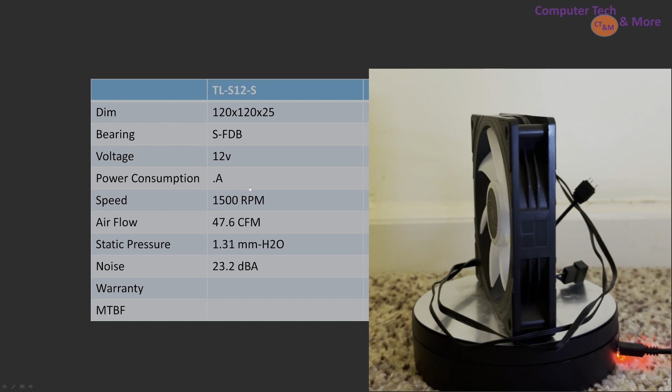First, the spec information: bog standard 120mm class fan, fluid dynamic bearing, noise, and everything else. Alright, here we are, taking a look at the RGB of the TL-S12-S. So I previously liked the TL-S12 regular, which doesn't have the illuminated central fan, as it's a little bit more subtle in its RGB, while this gives you more of that forward-facing blam, or however you want to call it. And, well, the RGB looks pretty good.

It has 8 inner LED lights, which is a pretty good amount. A lot of cheaper fans will have like 6, 8 is what I'm calling like the middle tier, and anything more than that is like higher tier fans. Sorry, my focus is really having a hard time with this fan keeping itself in. And of course the outer lighting ring looks, well, pretty good.

If we come around to the back, not nearly as sharp as the front, but there's only 3 struts, doesn't obstruct the view too bad overall. So overall, I call the back kind of a win. It's certainly appealing, and I think they have reverse blade versions of these fans. I hope to be able to acquire them because I have been trying to test more of these reverse blade fans that are coming onto the market to really know how much performance difference there is between regular fans and, well, reverse blades.

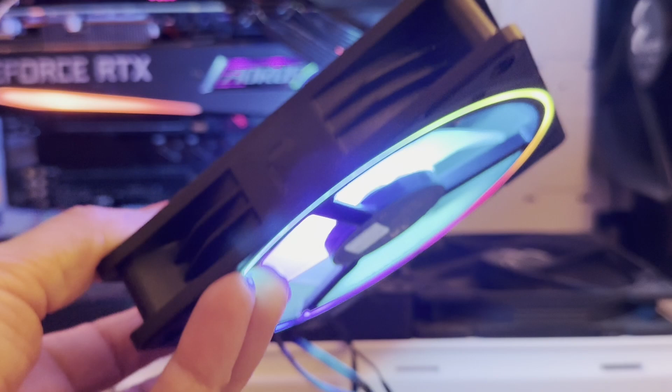As I stop the fan, here we go. The fan blades are fairly unremarkable. They're just smooth. The edge distance between the blade and the housing is actually fairly tight, which is great to see. It's one of the reasons why, despite the fan's low RPM, it's actually fairly efficient overall in terms of its thrust. Now, one weird thing with this fan is it has this cable sticking out the side. I just assume that it's extra power feeding into the RGB, but it's not very attractive, but you can also easily hide it. It's just one of those weird things I've noticed on this fan. It's got a little bit of rubber padding around the edges, but other than that, the design is pretty clean and basic.

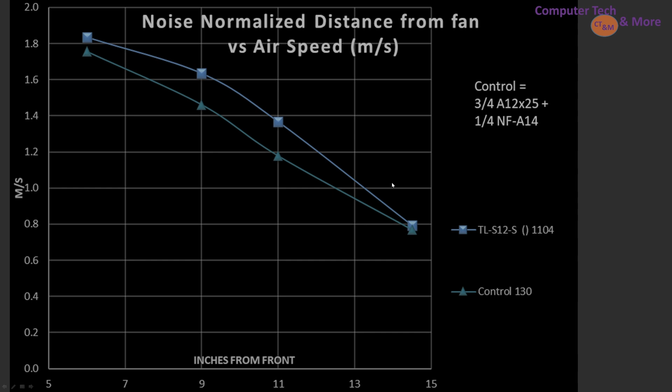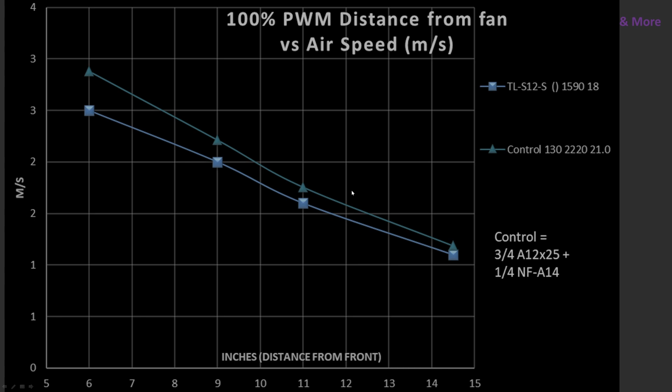At 100% PWM fan signaling, they line up very, very closely, interestingly enough. Mind, the TL-S12 is a little bit underneath; it's no surprise, it's spinning at a pretty significant amount lower than it. When we compare against other fans, noise normalized results, at my 10.5 decibel reading, the TL-S12-S is sitting right here in the middle of the pack. Actually, it's in a very good position overall.

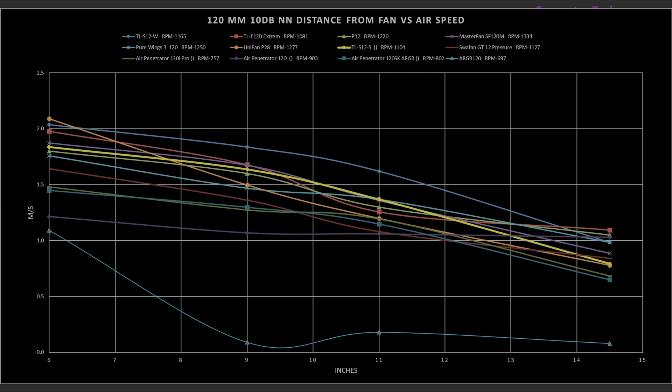If you're looking for something interesting, right here in this blue diamond is the first TL-S12 that I reviewed, and it does quite a bit better. So this is utilizing bearing and air noise going through it. So it could be that I just got a worse sample, or that one I ended up getting a golden sample. It's really hard to know, but it gives us a spectrum for some variance between the two fans. Or maybe it's just because the materials the fan is made out of to make it translucent change properties a little bit. It's hard to know exactly which is going on.

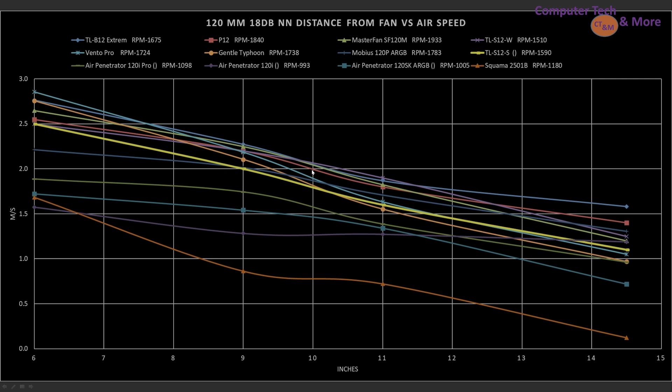I'm bumping things up to my 17.5 decibel reading, so this is a new noise normalized result. And it is towards the bottom end of these upper fans. Still a very good result, and at larger cases, it is basically middle of this upper end solid grouping of fans, so I'd call it a good fan nonetheless. If you're looking for the original S12, it's sitting just a little bit above it. This purple line with the X ends up overall, on average, slightly better than it.

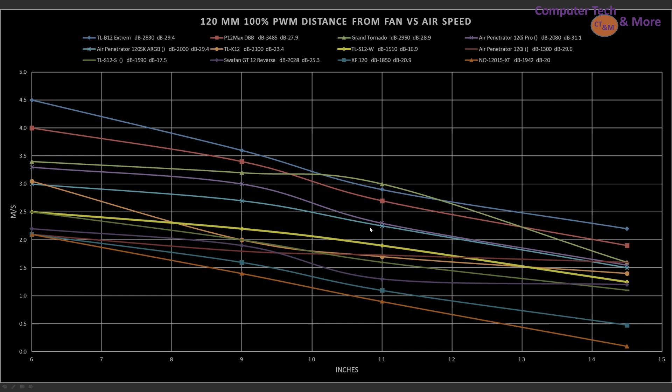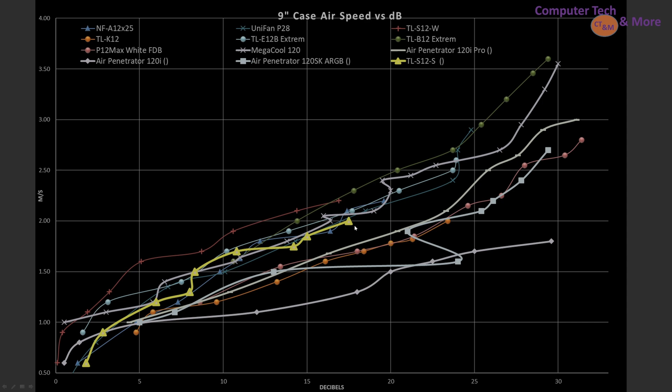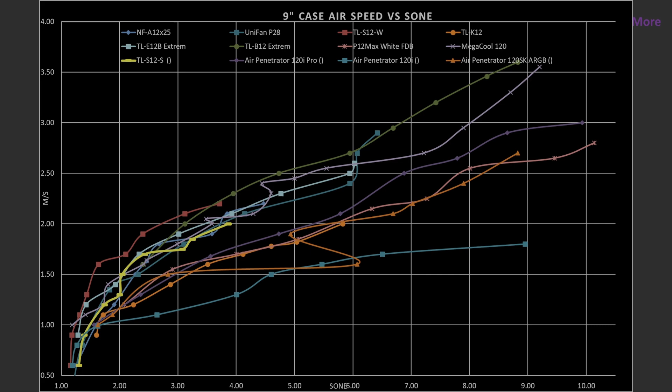Looking at the data in just a slightly different way, this time in Sone. Sone basically compacts noise levels that are quieter and stretches out noise levels as they get louder, so they extend off here to the right side a bit more. And the S12 doesn't get particularly noisy simply because it doesn't spin that fast, so it doesn't have the opportunity to get noisy. So in its performance realm, it does really quite well. So it would be an excellent pick, assuming you're not running an incredibly hot system. Then you might need more airflow, unless you can really stack your computer case with plenty of airflow cycling in and out with a number of these fans.

Now we're looking at performance on the CPU air cooler. The cooler of choice is the Noctua U12A. And on the left side here, we have airspeed versus RPM. This is basically blade efficiency. It's how good is this blade design compared to my blended control fan. And it lines up fairly closely. So that is, well, a good thing.

It does trail it ever so slightly, but not too far off of it. So I'd say its blade design is very effective. In terms of its noise efficiency, it is trailing my control fan a bit, but it's not too far off at lower RPM airspeeds.

But as things get cranked up more, it tends to fall away a little bit more, so maybe not as strong a choice in that realm.

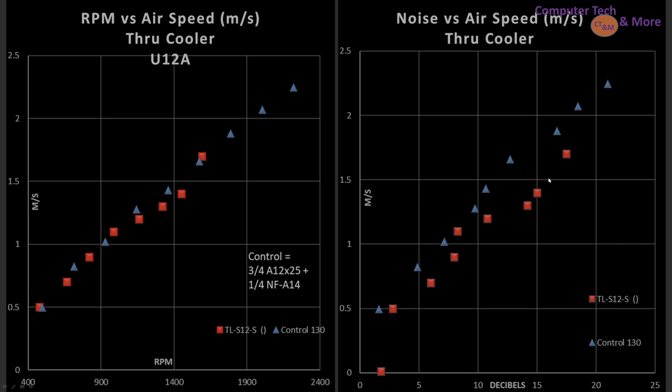And now validation for my radiator versus my air cooler. I ran the air through it. This isn't saying that the cooling potential between the two devices is the same. This is saying that the resistance to airflow, in theory, is similar.

This is one of the few tests where I found there to be a larger difference between the air cooler and the radiator. In most other fans, they line up near on identically. This is the only one where there's a bit more of a separation between the two, where the radiator is actually easier for it to blow air through, which is kind of funny because you would think the radiator would be the hard one, right?

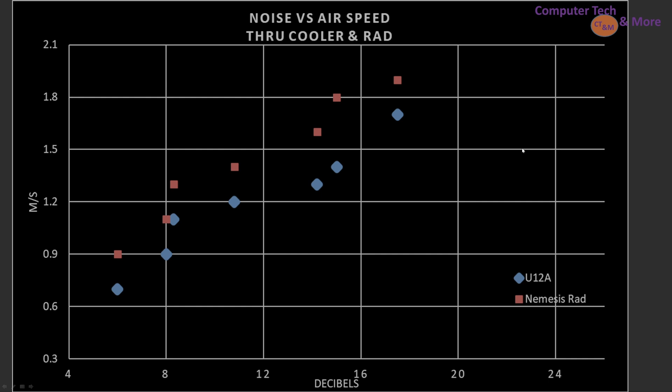Viewer suggestion, locking in those RPMs and just seeing how it does. I have my weighing factor over here on the side, if you're wondering how these fans are weighted, which is why something like the Iceberg Thermal Xtra is rated so high, but it is not ranked first because its noise level is screaming loud compared to the other fans around it, so that drops its position back quite a ways.

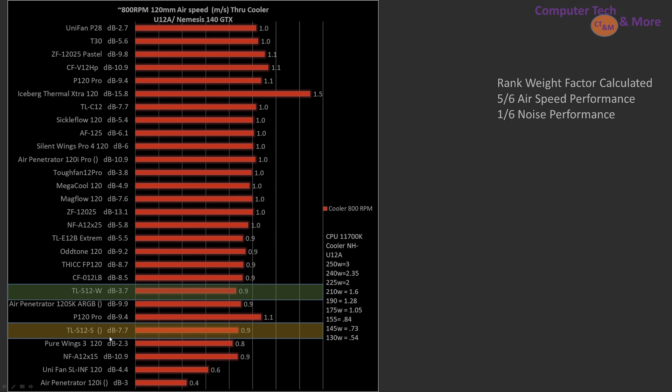The S12s are ranked towards the bottom of this graph at 800 RPM. It's just not where they're particularly effective. I don't think that they're gripping the air quite strong enough to generate that pressure. By the time we hit 1,500 RPM, they look a little bit better, but the TLS12S is trailing behind, actually pretty significantly. I would expect more out of it.

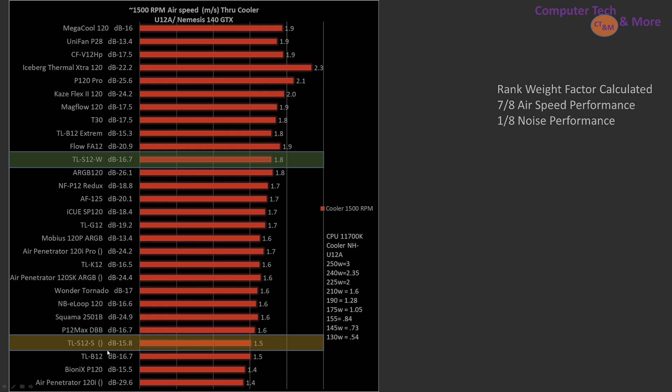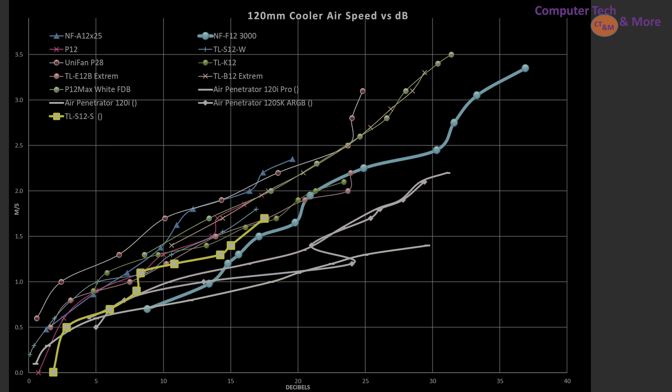And now airspeed versus noise. The S12S is sitting in the middle of the pack, like bog standard middle. It's fine. Take a look at the same thing, but this time in Sone. Again, it's telling us the same story. It's fine. It's not going to win any awards. It's not the echelon best of the best. It doesn't get high enough RPM, but in its speed spectrum, it's doing really quite well.

Now we're on to CFM. CFM is you put a fan, you got a tube, you blow air down the tube, and you take an airspeed measurement. It isn't particularly useful, in my opinion, for computer case airflow because it hides the fact that the fan has a tendency to shoot air off to the sides, but I've included it because many other reviewers do a similar type test, and I wanted to include that data for all of you.

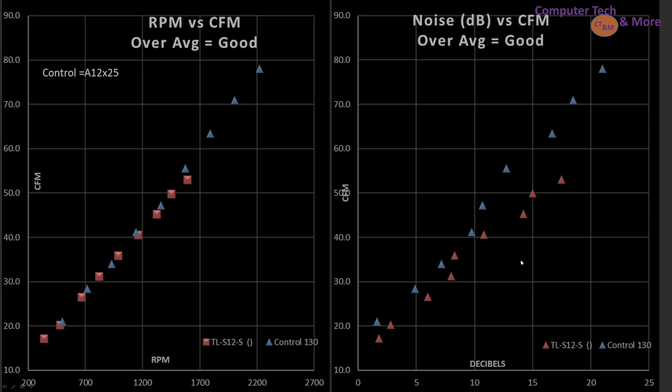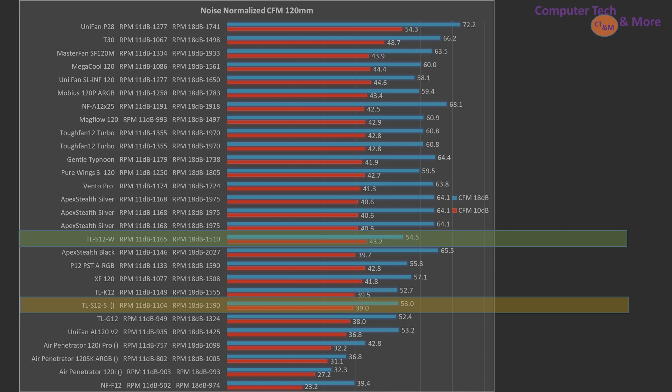Noise normalized CFM, the S12 versus the S12S, similar positioning, both in pretty good positions. Not a lot of change going on here from previous tests we saw. They're doing perfectly fine. At 100% PWM fan signaling, it's no surprise. Once again, it's just to show the stark difference between 1,500 RPM fans to really high performing ones.

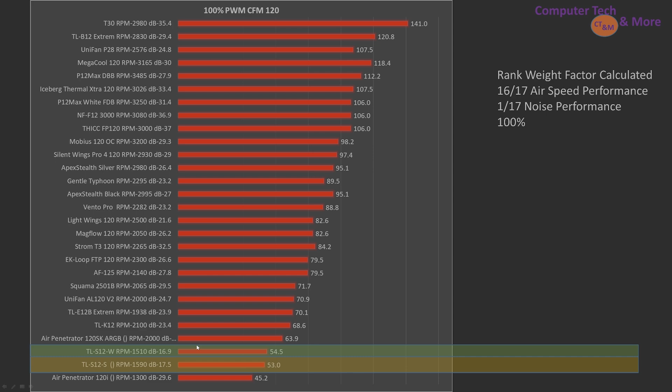Their noise levels actually aren't that bad considering their RPM, and they're beating out some other fans that actually spin a little bit slower than it that I listed on here. So their noise levels are actually just fine and dandy, and their airspeed that they're able to push makes a lot of sense given their RPM. Then we have CFM versus that decibel rating, bottom middle of the pack, perfectly adequate position for them to be in.

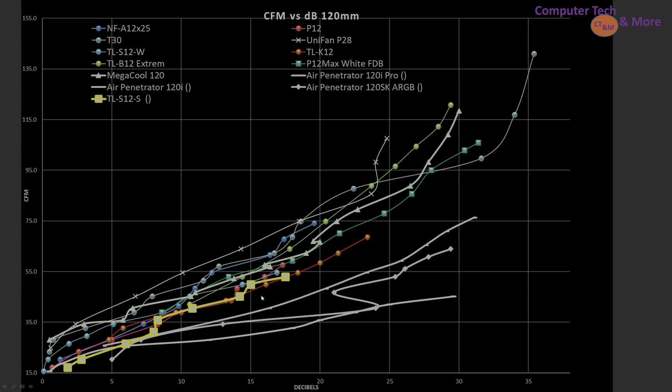Now we have a value proposition. This was a triple pack for $15, so that's approximately $5 per fan. Do note that sales do happen and prices do fluctuate. And with tariffs, who knows what will happen to the prices. But this is what they were at time of creating this review.

Now, I want to reiterate a point. Value proposition isn't performance. It is performance per dollar. So a fan that is cheap enough, even if it has terrible airflow, will rank really well in these graphs. While a fan that might have the best airflow, but is too expensive, is going to rank really badly. It is up to you to determine which fan best suits your needs within your price range. I'm just presenting the data for you.

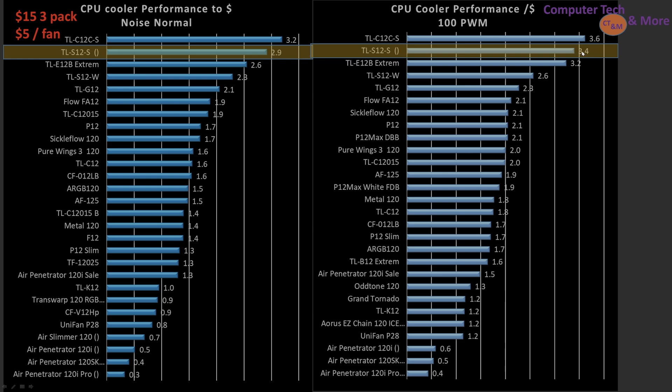Now, if you're joining me as a TLDR from the very beginning of the video to jumping to the end, this is for you. And if you made it all the way to the end, this is sort of a brief summary of what we're generally finding about this fan. So first, in CPU cooler, low wattage. For the coolers, it's assuming that whatever cooler you're going to slap these to is capable of handling the thermal load. But for a CPU cooler and low wattage, it's an average performer. There's its rank. Its value is great, which is the best that I can call it.

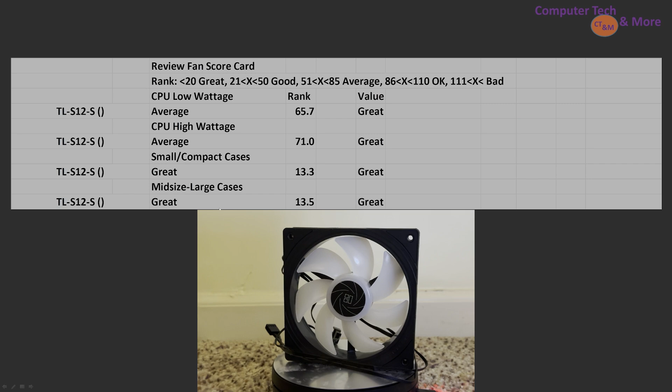In terms of its capability for high wattage CPUs, I'd also call it average. There's its ranking, and its value is also great. For small, compact computers, its performance is also great. There's its ranking and its value. And for mid to large size, it's also great, and its value is great. So overall, it's a fantastic value fan, and overall does either average for coolers or is a great fan for computer cases. And that brings us to the end of the video.